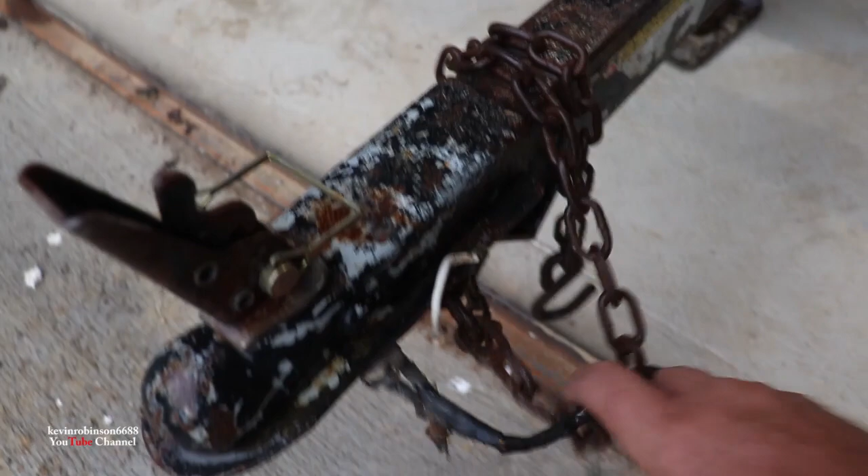Here's the wiring harness, it's been chewed off. The back light here, well, there isn't much of one there. Let me get you around here. There's not much of a light even there.

There's a little story behind these lights and wiring, the reason why they look like this. I figured if I got pulled over and told the cop the truth about why the lights look like they do, this one here ain't too bad, but we're going to change it anyhow, he would probably laugh at me. This trailer was actually sitting up in the field where the goats were, and the goats nibbled the wires off of the front and busted that light with their horns. I don't know what they did with the rest of it, but the goats really tore it up. I figured if I told the cop that, he would probably laugh at me. I'm not so sure I'd get out of the ticket, but I know he would laugh.

So we're going to try to get away without getting a ticket. And we got the new tires on there. The old tires were dry rotted. We blew one out - if you guys watched that, that was our last video.

Now we're going to do a lights and wiring harness on the trailer. This is the light kit we're going to be putting on the trailer, and this kit comes with both lights for in the back. It comes with a couple marker lights, which I don't use, I have reflectors on mine. And then it comes with the wiring kit, which is in the back, right inside of here.

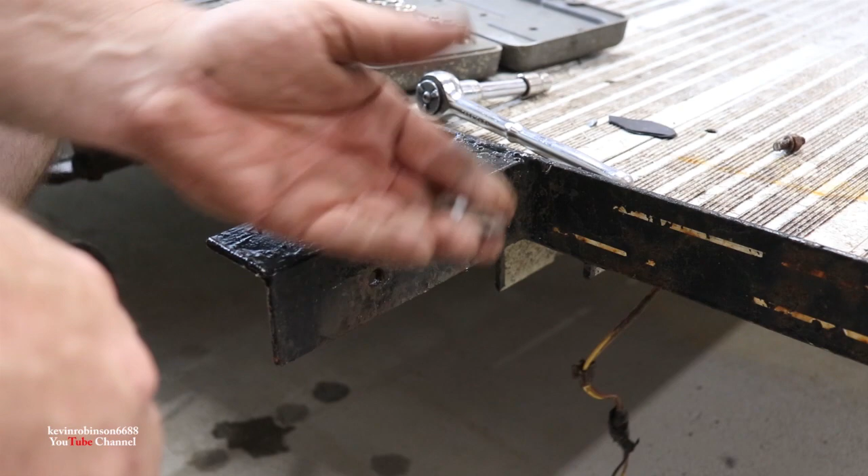Alright, now we're just going to take a hammer and knock it out. Oh, we won't even have to take a hammer. Here we are, both our little studs will stick in through there, come right out. All rusted up, you know they weren't going nowhere. That's for sure. So now we'll just clean that up a little bit, and we'll be able to mount our light on there.

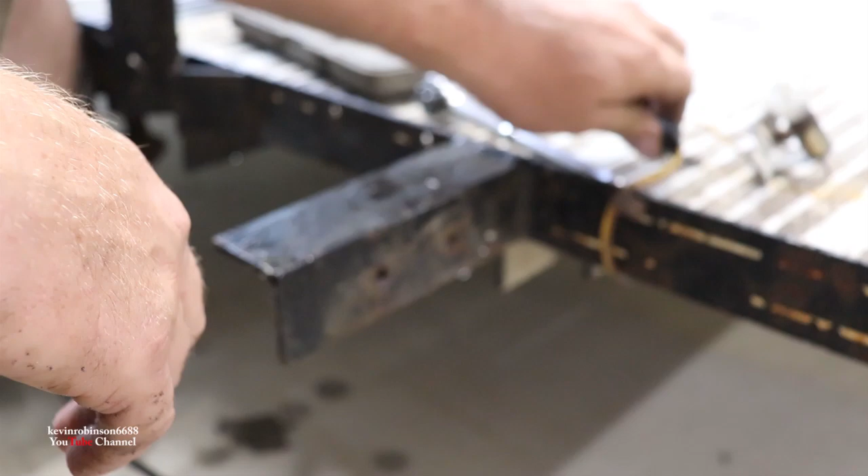We have to continue taking our wiring harness off. You got to watch when you're taking your harness off these little clips. It's nice to have these clips because they go up on the bottom of the frame to hold your lights into place, so I'm going to do my best to save all of these that I can. If you don't have the clips, I'd suggest taking a small drill bit and drilling some holes along the edge of the frame and putting some zip ties in there to hold them up. Because it seems like every time you go over something, these lights will be hanging down.

Next thing you know, they catch something, rip your harness off, and then you ain't got no lights again. I've done that about a million times. So we just want to make sure the lights are attached to the bottom of the trailer frame really good. Being that I want to save those clips and don't want to save the wiring harness, I'm going to come in here and clip that. Might as well go down here and clip it too, right before that little clip. We'll cut it off right there, and then we should be able to slide this thing out. Maybe got a little screwdriver here, twist it a bit, see if we can get it out of there.

I do like these little clips. I don't know if you can buy them or not, but they're nice for that wire. See, that little piece there slides up on your frame, right there. And then this part here, you snap your wire in it. So you snap your wire on first, and then you slide it up on the frame, and it kind of holds it in place pretty nice.

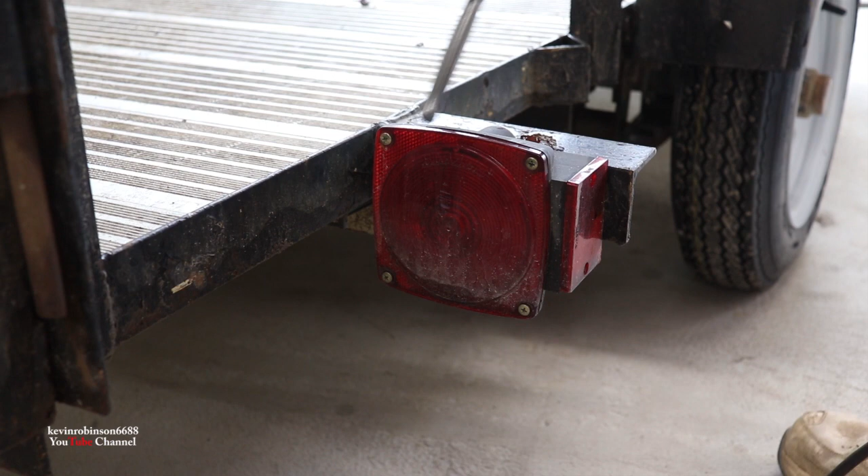So I'm going to go ahead and continue taking off the other lights. We got this side off, I'm going to get the other side off, and we're going to get that harness out of there. Alright, we went ahead and put a ratchet on the back of this one, and it's not moving either, so we're going to go ahead and cut this one off too.

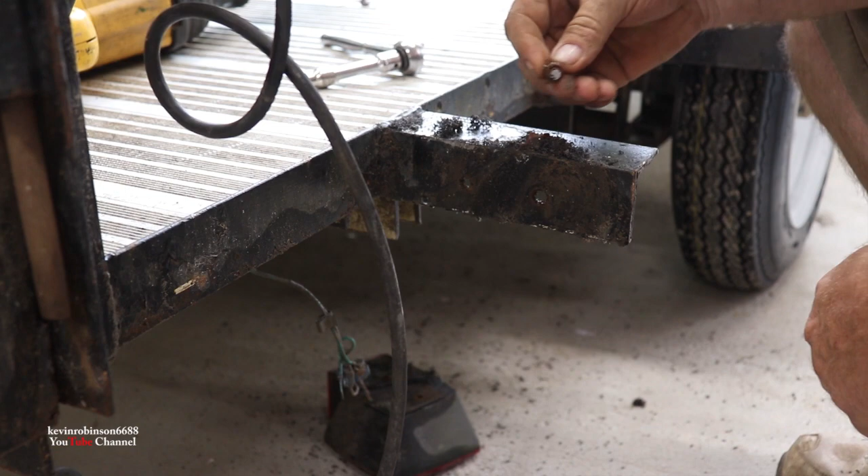Okay, quickest way to get the lights off, right there. Pull our little bolts out. Looks like the other one fell. Here's the other one, and here's our light. We'll cut off our little clip.

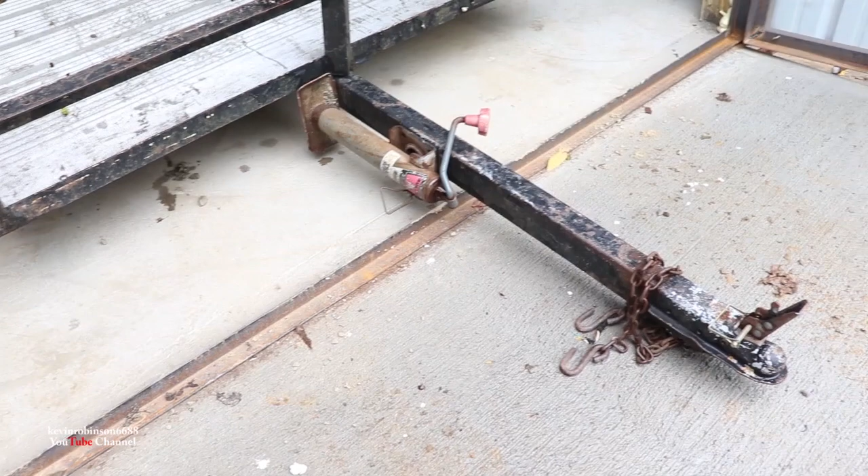Now we'll start pulling the wiring harness out. I found out if you put the jack down like that and put the trailer tongue as far to the floor as you can, it gives you more room in the back to get up underneath there and get these wires out.

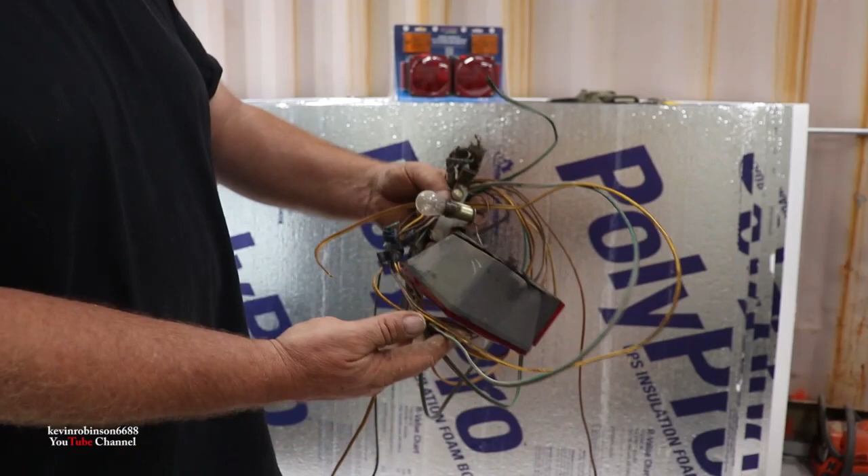Now my wiring harness goes up through the tongue, goes up through this part, and I already cut all the wires back there, so I'll just slide these out. We have all the wires off the back there. Now the whole harness is out. Okay, this is what is left of our wiring harness. There's not much to it. Pretty rough, been on there for a long time. It's definitely time for new, so let's get the new one out and get it mounted on.

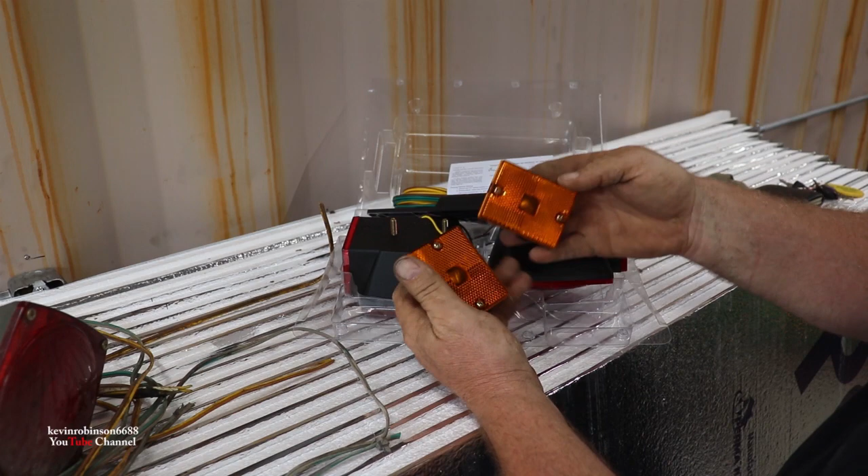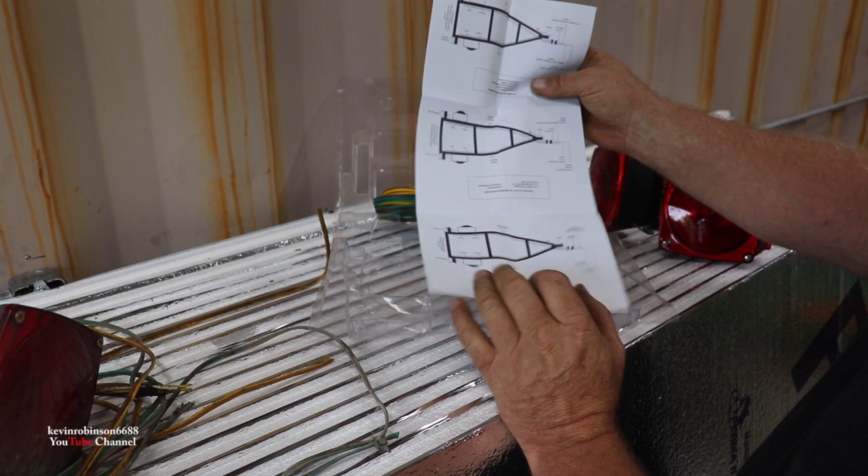So these two little marker lights, we're not going to be using. I noticed one of them was broke on Rick's trailer, so we're going to put these on Rick's trailer in the future. We have a right and a left light for our trailer, and a license plate holder, which we won't use because I put mine right on the back of the tailgate, since these here get ripped off all the time, so there's really no use putting that on. It's garbage. And then it has an instruction manual on how to install your wires, and that's pretty simple. Just go over whichever one is your trailer.

I guess you got to figure out which one's English. There we go, pretty simple setup. So let's get the harness mounted into place and get these guys set up.

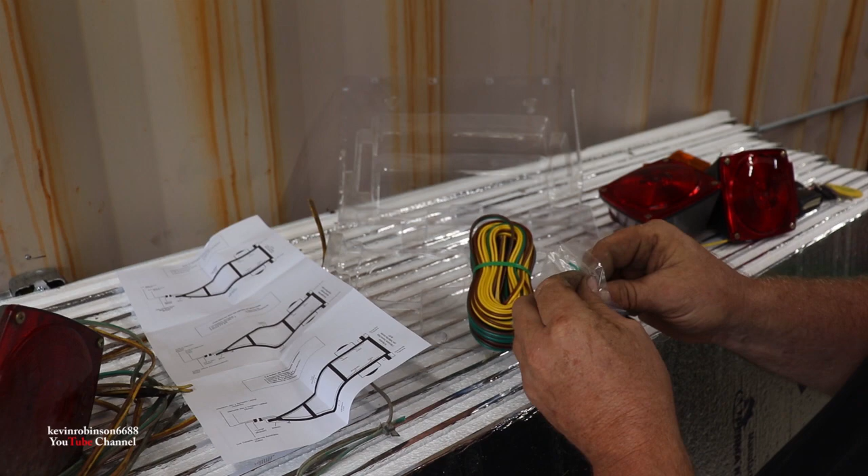It comes with new little clips too, that's pretty nice. The little ones I thought you couldn't buy, but it comes with a bunch of them in here. So we'll use the old ones plus put the new ones on, have it up in there nice and tight. That's going to be cool. Yep, lots more connectors there.

So let's get it undone here and get it put on.

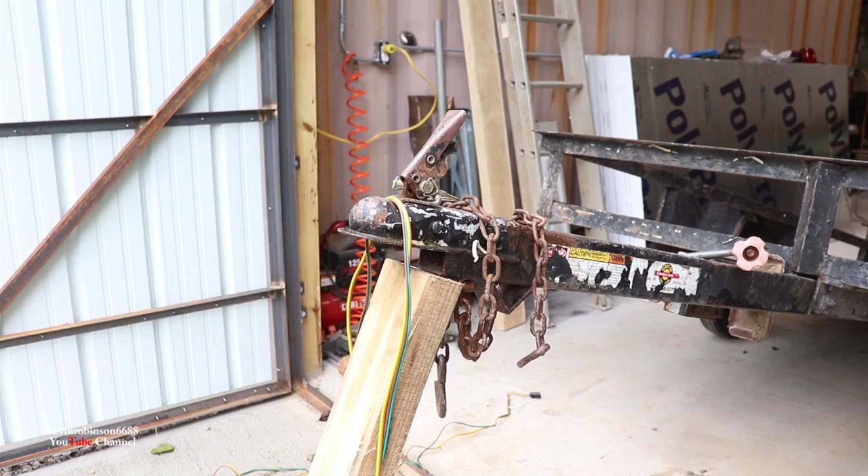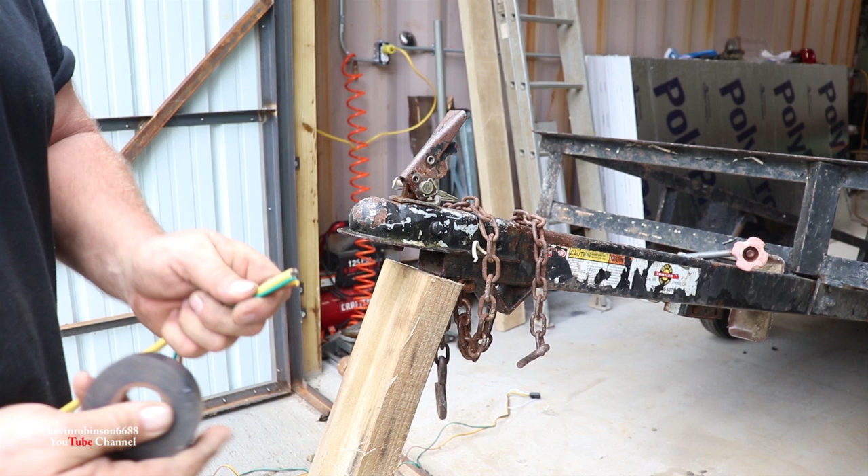All right, what we got to do now is get these wires to go down the tongue of this trailer, and they're pretty flimsy. So I got a piece of 12-2 wire we've been working with. I'm going to take them both, put them right on here, and put a little bit of tape around the end of this. Hopefully this 12-2 wire is strong enough to drag the other wires down through that pipe, because that's a long ways to go to put these little flimsy wires.

Let's get them going. We got our wires hooked to the tip of this heavy wire, and we're just going to kind of guide it right down through there and see if we can make it all the way to the other end, come out the back side.

I'll show you down here where it came out at the bottom. See, they made it all the way back to here. All we got to do is pull our tape off and pull our wires down through until we get them all back through here. We want to save enough up there to hook to our vehicle. So that's how I got the wires through that tube.

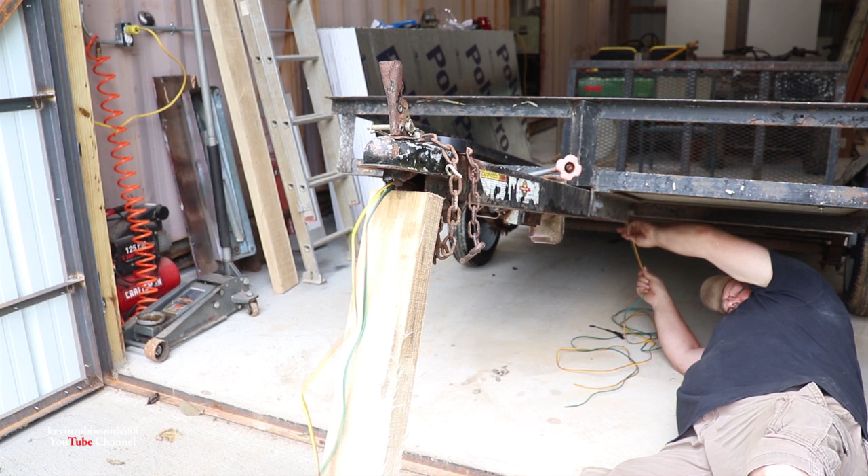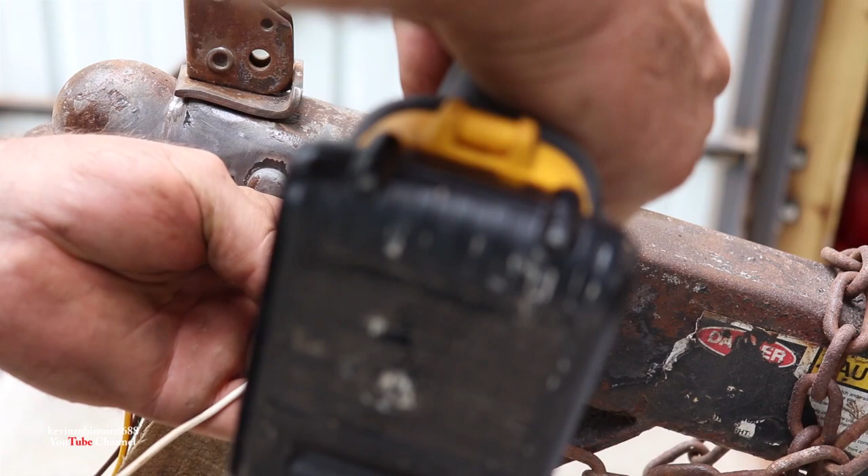Okay, I took a wire brush and cleaned this all down pretty good, and I need to extend my ground just a little bit further than what it was, so I'm going to go ahead and add a piece of wire to this. Hopefully we can get this done here.

Okay, now that's my ground. I'll break that little bolt there off, or cut it off, and we're going to extend onto that just a little bit. I want to make sure I have plenty of wire in the front for turning, so we'll go ahead and get this wire put together.

We're just going to hook the two white ones together right here, and then we're going to tape all these wires together. We don't want them out there separate, we want them all taped together.

Okay, we got some stuff here to keep this wire from corroding. Now, really, I would be using a soldering gun for these, but I don't have a soldering gun here. But this should work just as well. If we have any issues, this is probably where it's going to be.

Now we're going to get all these wires taped together, so that we'll have one wire going up to hook to our truck.

Okay, it's pretty important that you know which wires are going to go on what side, and you have a diagram. They give you a diagram, like so, and this little diagram tells you which wires are going to go on what side.

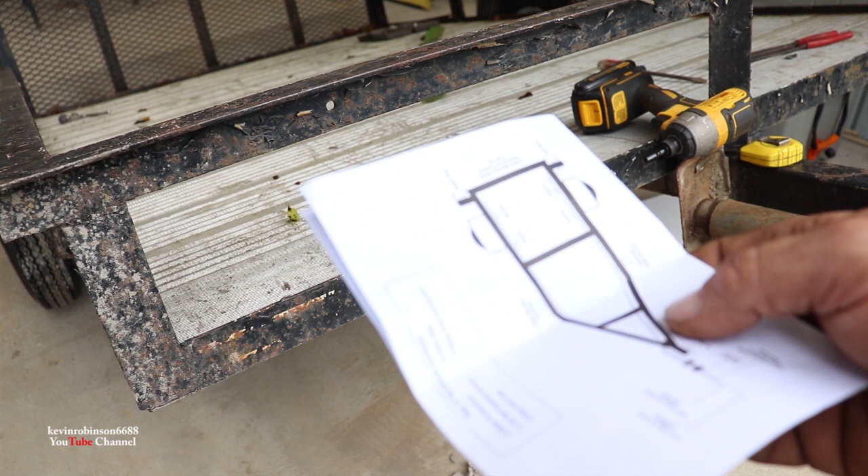Now we'll put it in the same angle as our trailer. Our green and brown is going to be on this side of the trailer, and our yellow and brown is going to go on the other side. Now, if you get those two mixed up, you're probably going to be screwed up when you put your turn signal on, and people are going to think you're turning right when you're really turning left, or turning left when you're really turning right. So you want to make sure those go in the right place.

So green and brown - if I'm facing the trailer this way, it's on the left side. And yellow and brown on the right side. So let's get those wires tucked in there and get them out the back.

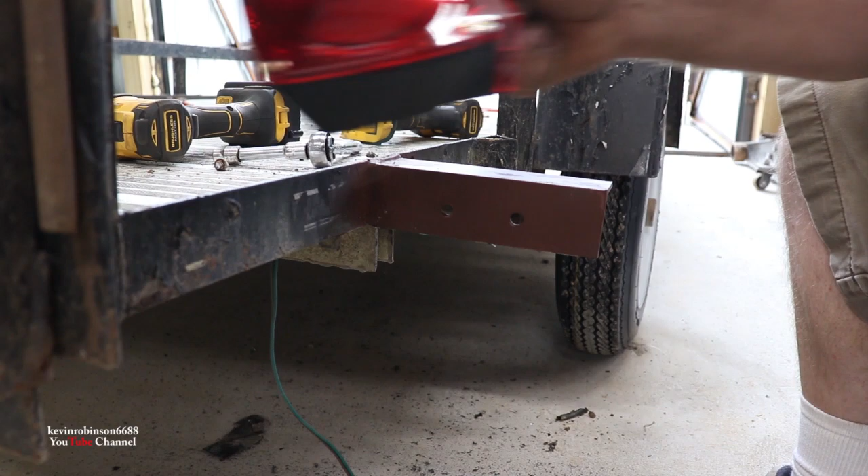Okay, we're going to go ahead and get our light put on there. I wire brushed that bracket down real good and put a little bit of primer on it because eventually we're going to paint the trailer, but it's not going to happen right now, and I figured might as well have it clean underneath there before we put this thing together.

And these are just a little 10mm socket. We'll tighten them up, or a wrench, it'll be fine.

Okay, get our wires hooked up to this one, which would be no problem at all. Get them hooked up and then we'll move on to the next one.

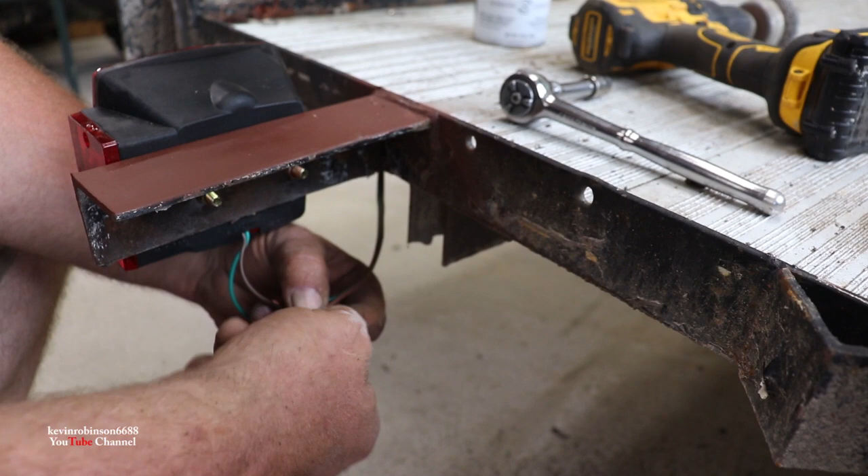Okay, what we're doing is we're just stripping them down and we're going to twist them together and tape them. I don't have a soldering gun right now with me, but eventually we'll want to take these back off and use a soldering gun. And then a little shrink wrap would be nice. I just don't have it here.

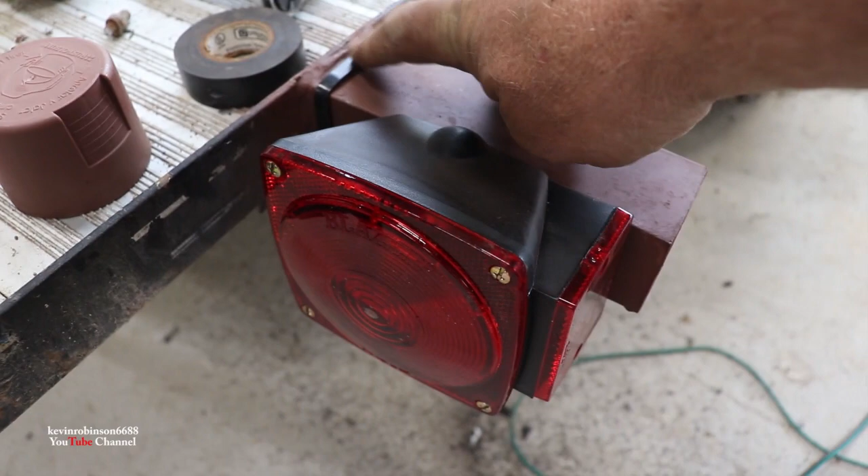So we'll get these taped up and then we'll put a little zip tie to hold them up in there, and this side will be finished. Okay, one light finished. Nice little zip tie up here to hold that wire up tight underneath there so nothing catches it. That one's good to go, so let's get to the other side and get it finished.

If you ever get mixed up and don't know exactly which one goes where, the one on the driver's side will always have the license plate light on the bottom, and the one on this side over here will not. The passenger side will not. That's a pretty easy way to find out which one goes where. Also, the wires coming out of each light are color coded, and they're going to match the wire that's coming back. So if you get the right one coming back, you're going to have the right light. All you got to do is look for the wires. So now all I got to do is get them mounted on the truck and see if they work.

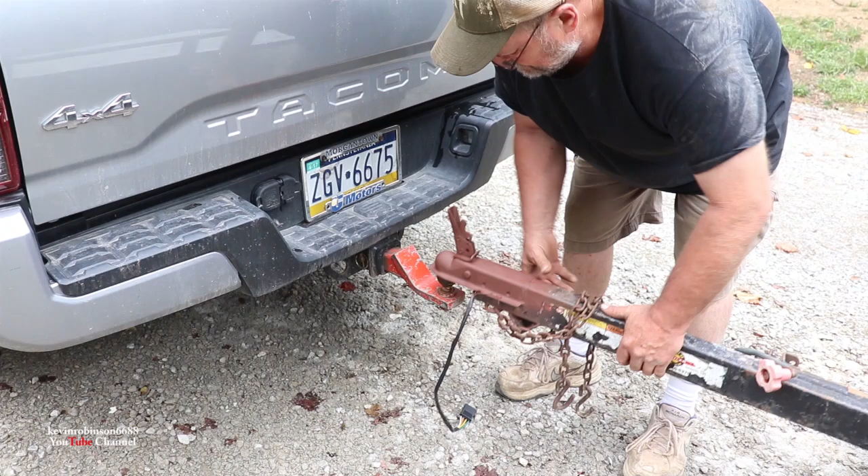Okay, plenty of wire there. Going to hook our chains up because we're going to take this guy home and we're going to get a couple things to bring over to the shop. So let's check out these lights and see if they work.

Well, looks like we got parking light. Let's try to turn.

Now, what do you think of that? Turn signal works on this side.

Turn signal working on that side? Yeah. You know, it'd be much nicer if you guys could tell me if it's working or not. Let me do the 4-ways.